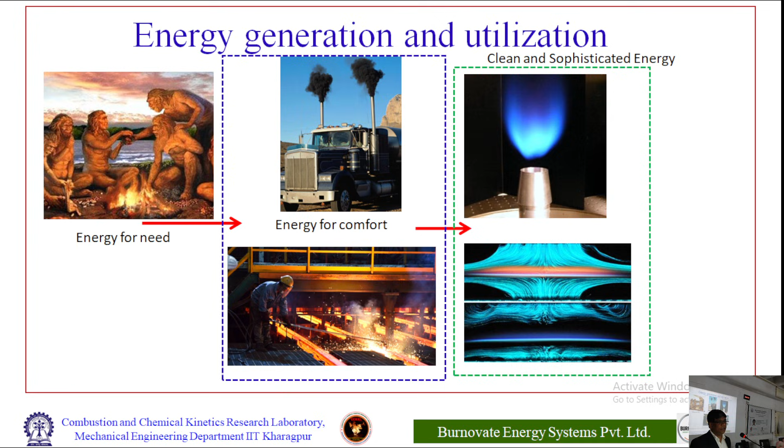Combustion is the first research of humankind. As you know, once flame or fire was identified, our civilization began. From that point to this point was a duration of thousands of years where we were not worrying much. Then after, energy efficiency needed to be increased and polluted emissions needed to be decreased - that was our primary goal. So finally we moved towards clean combustion, then towards sophisticated combustion technologies. But still, burning hydrocarbon fuel remains a problem.

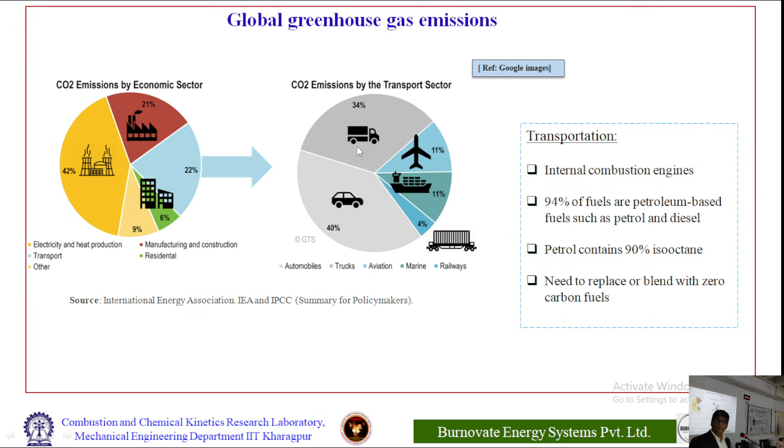So why do we need to focus on particular sectors like industries, automobiles, and transportation? This is the scenario - out of the total emissions, this is the sharing of these sectors. Now, to regulate these emissions, we formed certain emission indices. Earlier we used to follow the BS stage, meaning the Euro stage, now we have moved to the Bharat stage, our own standard. This is the difference between stage 4 and present stage 6, which is still not completely implemented across all combustion systems.

However, achieving the BS4 norms itself was very difficult. If you see over here, this is 0.63 grams per kilometer for the case of CO. In case of BS6, the same standard has been maintained - meaning even though the stage has changed, further reduction of CO is very challenging. However, NOx emissions have decreased. So between stage 4 and 6, these are the changes in NOx emissions.

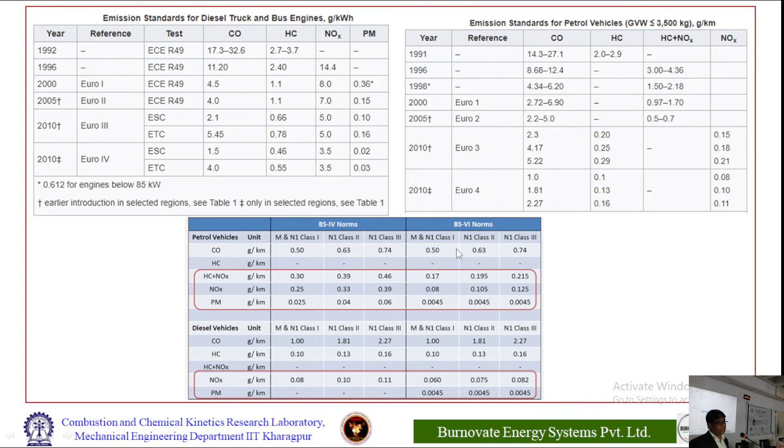Now what to do next? What is happening is the population is increasing, and even our comfort zone is increasing - meaning the number of AC applications, vehicles, and all other things are increasing continuously. However, even though we are in stage 6, our net emissions keep increasing because it is cumulative. So now what to do? We have to find out something like non-carbon phenomena.

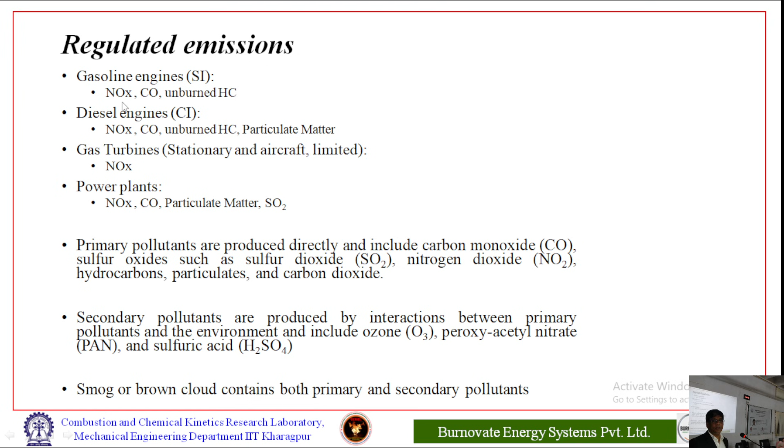Before going to that, let us see what the problems are with CO and NOx. Suppose this is CO exposure in hours - this much CO concentration and exposure time determines how much carboxyhemoglobin forms in our blood. If you see over here, for the case of 100 ppm, if we are exposed for around 2 to 3 hours, then we will start feeling headache.

This is a condition of what? So you are stuck in traffic and the traffic is very slowly moving, okay? So this is the condition, and you will be getting a headache, okay?

So if this is the situation, like you are working in the plant, all of a sudden certain combustion systems have gone off, okay? So now you will be fighting over there about what has happened, what is the situation over there. Meanwhile, even 1 hour of exposure is sufficient for a throbbing headache, right? And if it is around 600 ppm, this is a much more dangerous condition, even less than 1 hour, so this is like a coma, okay?

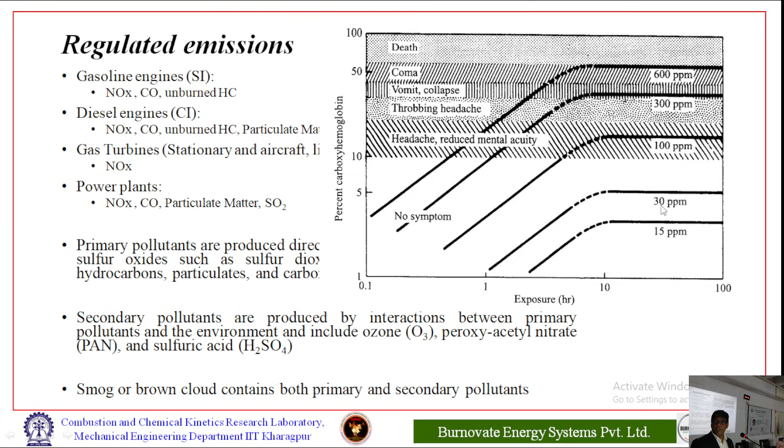So now, these are not the severe cases, they can even be identified, but the number of vehicles is increasing continuously, so the net amount is increasing in the atmosphere, right? So that is one. In case of NOx, what is happening? Even this NOx footprint is more dangerous than your CO footprint.

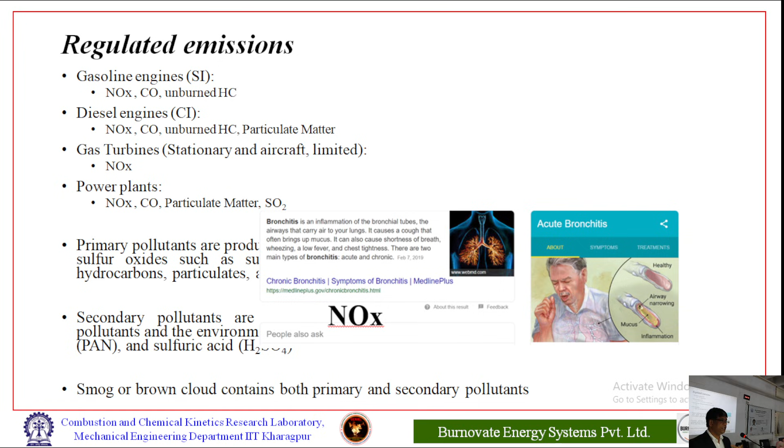Because of the NOx, your inhaling system, these particular tubes, get cladded with mucus. Then when you are inhaling and exhaling, you feel a certain situation like irritation, and that irritation gives you a cough. So this is one particular phenomena.

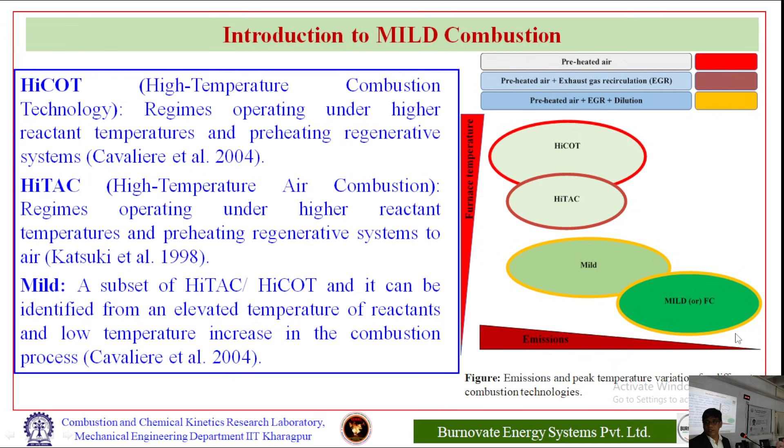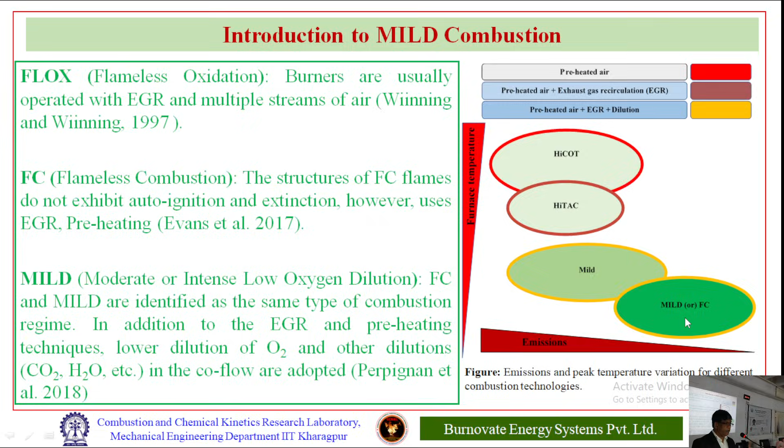So emissions are certainly high, and efficiency is increasing, but how to reach this particular balance? We are not much worried about that. The combustion should be stabilized very well, and the emissions should be low enough. So then how to achieve this? This is one novel technique for hydrocarbon fuels, called flameless or mild combustion or colorless distributed combustion. Different people call it by different names.

The name itself tells you thermal NOx, meaning this NOx is very well related with temperature. If temperature is increasing, the NOx concentration also keeps on increasing. Another one is fuel NOx, that is, if nitrogen is there in the fuel, when a cracking phenomenon happens inside, that forms NOx. The next one is prompt NOx. This is not very dangerous because it happens at the beginning of the reaction, and then it controls itself like other NOx.

Now this particular thermal NOx, what is happening here? Whenever temperature is above 1800 Kelvin, right, then your nitrogen, N2, splits into N and N, and oxygen splits into O and O. Then these kinds of reactions are severe over there, like N2 plus O forming NO, plus N plus O2 forming NO again. This particular NO is called NOx, as you know very well, right? This reaction can be called the Zeldovich mechanism, because the scientist identified it long back. If you want to suppress this thermal NOx, you have to maintain your temperature below 1800 Kelvin, right?

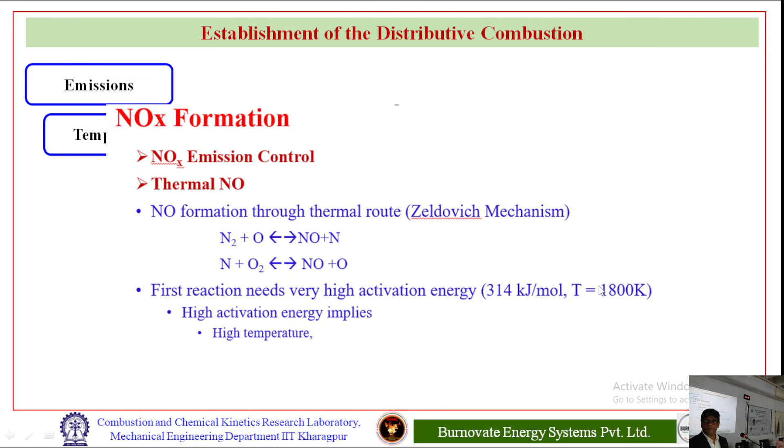So now, in case of our combustion system, when you are running combustion at low temperature, we can call it lean combustion, right? So obviously your NOx is very low because the furnace temperature is less, or the combustor temperature is less, that's what makes NOx emissions less. But what is happening? Unburned fuel, or unburned CO, is dominating over here, meaning CO, whatever is formed from the fuel, is not being consumed completely, right?

On the other side, if you go for a higher temperature, what happens is the CO is completely consumed, but still NOx emissions are high over here because NOx is directly related with temperature, right? Then what to do? Obviously there is a solution: if you run this combustion somewhere in between, then both your CO and your NOx emissions are low.

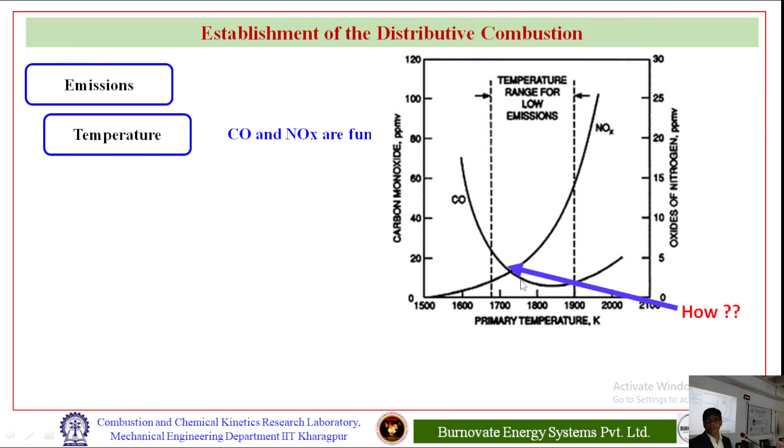So you can say this is lean combustion, and you can say this is around stoichiometric combustion, so in between may not be possible very well, meaning stabilizing the flame in conventional flame is difficult over there. So to attain combustion in this particular zone, the concept of flameless or mild combustion or colorless distributed combustion has been identified.

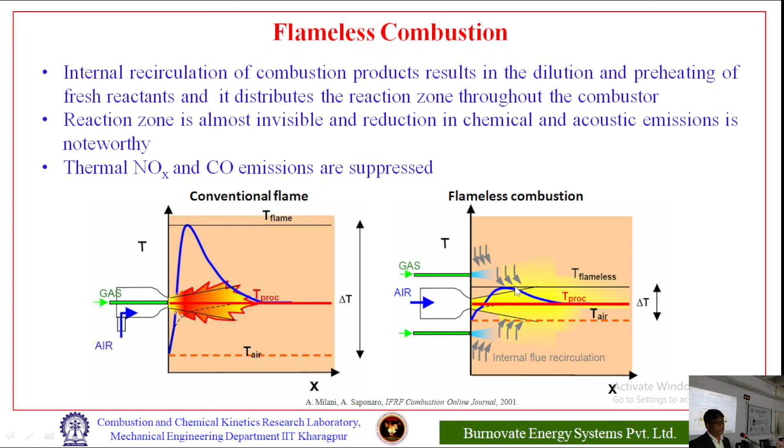Here, oxygen is not directly available; it gets distributed over here. That's why the peak temperature is reduced. So whatever so-called NOx formation occurs, that NOx formation is reduced here.

This particular phenomenon of flameless combustion was initially identified by Wunning et al. He was actually a scientist in a particular glass company. The glass company needed quality, complete combustion with reduced emissions, clean combustion as we can say. When they were experimenting, all of a sudden they identified this particular phenomenon.

Then they applied certain concepts and measured this particular phenomenon, how much amount of heat is to be recirculated, how much amount of exhaust gases are to be recirculated.

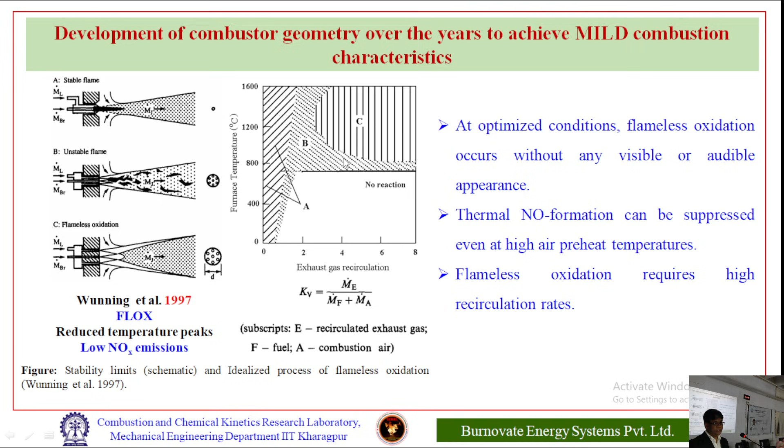Here, again the similar condition like no reaction, but temperature is increased, so this particular zone is called unstable flameless combustion, or conventional combustion in between. This zone is complete flameless combustion.

However, once this particular topic was identified by Wunning, some prominent researchers started working in this direction. What is the reason behind achieving flameless combustion? What are the conditions required to stabilize the flame?

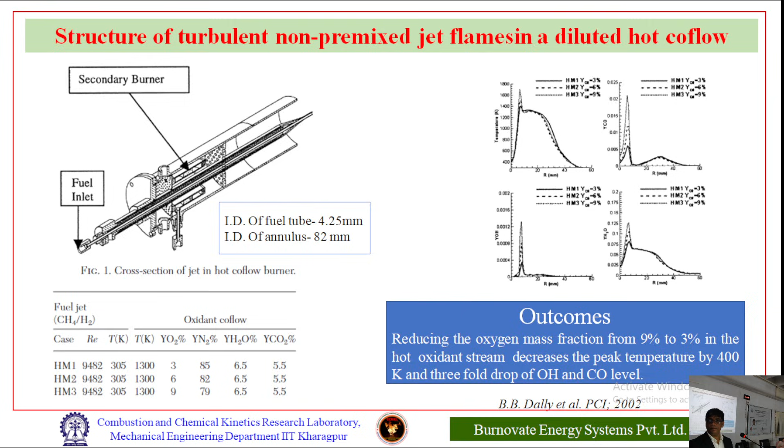Initially, three prominent people, like Professor Dally and Professor Sudarshan Kumar from IIT Bombay, and even Maria Giovanna from Italy, worked significantly on this particular concept. These are a few results of Professor Sudarshan Kumar from when he was doing his PhD at IISc Bangalore. This is my study when I was doing my PhD under the guidance of Professor Sudarshan Kumar again.

So far, whatever happened here was flameless combustion with gaseous fuels. In this particular case, achieving flameless combustion is difficult. However, compared to liquid fuel, it is easier, we can say.

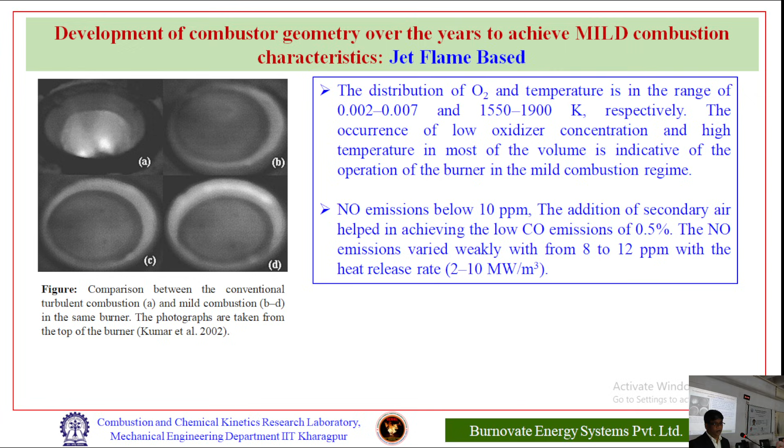In case of liquid fuel, what you need to do: initially the fuel needs to be injected as small droplets, each droplet needs to be evaporated, this evaporated species needs to be distributed inside the combustor. If the mixture is within the range of flammability, then only the flame stabilizes.

So in case of gaseous fuel, if the gaseous fuel and oxidizer mix very well, then combustion is stabilized. Here, before that reaction, many sequences of operations are there, and these need to be completed.

So until those conditions are satisfied, we have to recirculate the fuel and oxidizer very well inside the combustor. That means, compared to gaseous fuel recirculation-based flameless combustors, in this particular case a well-stirred reactor is required here.

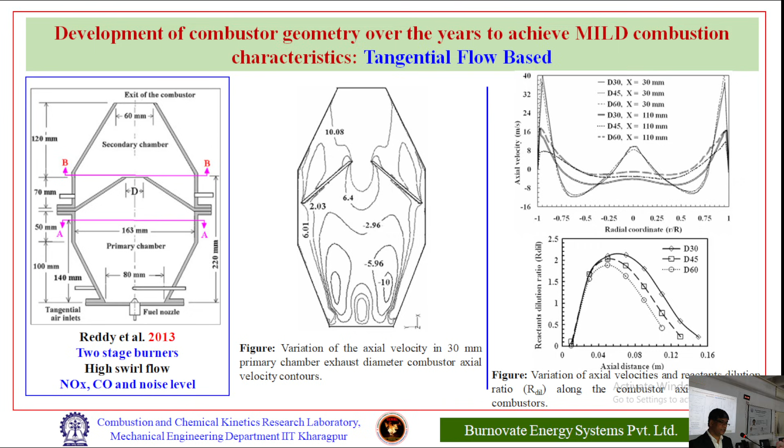So why are we explaining this particular flameless combustion concept called well-stirred reactor or perfectly stirred reactor? These particular concepts we are going to utilize in ammonia combustion as well as hydrogen combustion in further slides. So this is our flameless combustion with liquid fuel.

This is the conventional flame, as you can see here. This is the flameless combustion. As the name suggests, there is no flame here, meaning no visible flame. However, a very small flame is visible here.

Otherwise, it is like a transparent orange kind of environment. The flame was stabilizing. Even though this particular combustor was big enough, from the top of the combustor the entire combustor can be seen very well.

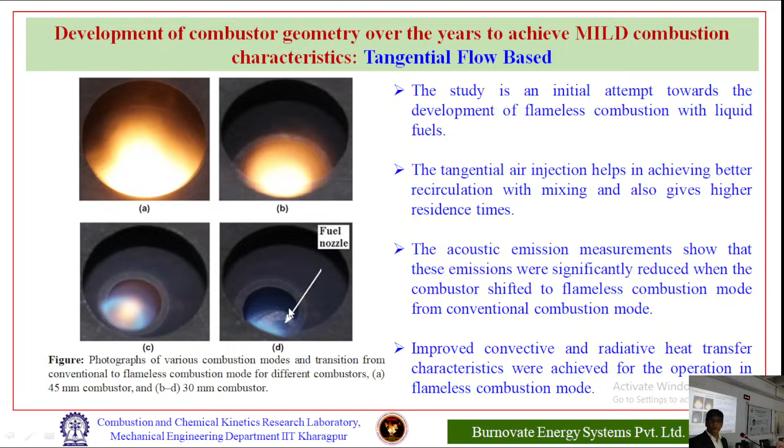So this is the recent technique of conventional fuels. Now the challenge is, if you are using conventional fuels by adopting this flameless combustion or mild combustion or colorless distributed combustion technique, still CO2 is coming out, right? When you are running carbon fuels, CO2 will be produced. However much you minimize CO and NOx, you cannot avoid this CO2, and that CO2 is causing global warming and certain other issues.

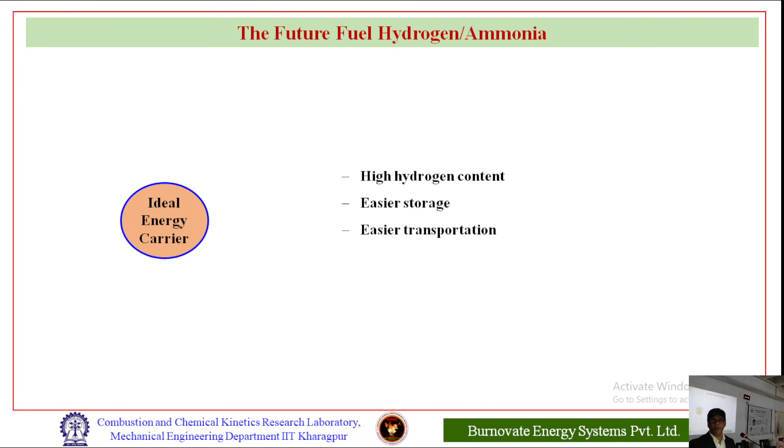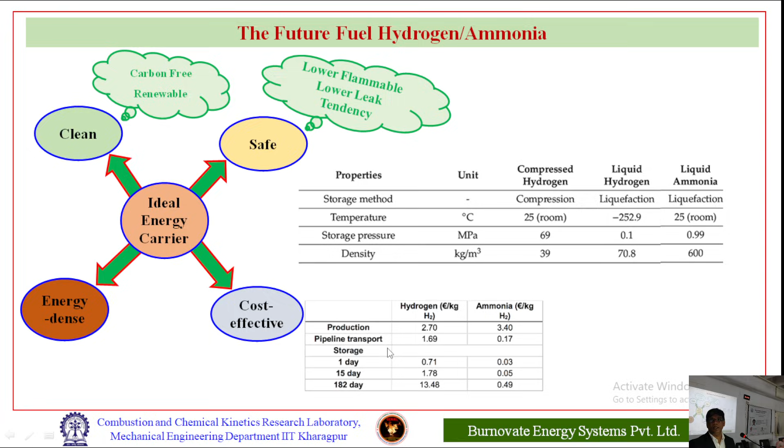Okay, now what to do? We have to go towards non-carbon fuel. Then what is the strong non-carbon fuel? Hydrogen, right? We have identified hydrogen as the potential fuel for that. Now let us discuss the challenges involved with hydrogen, then let us come back to ammonia. This is a very introductory talk, many students are involved here, so let us see step by step.

So what is called green hydrogen? Green hydrogen means, first, we do an electrolysis process. Water electrolysis process means we take one anode and one cathode, and water is continuously supplied. The water splits, and from that splitting or cracking of the water, hydrogen and oxygen are produced, and the rest of the water comes out again.

To complete this process, certain energy is required. Then how to take that energy, where to take it from? If we use energy from green resources, like photovoltaic cells, solar energy, wind energy, or hydro energy - non-carbon sources of energy - and do electrolysis through that, whatever hydrogen is produced can be called green hydrogen.

Next, pink hydrogen. Here we are not using renewable energy sources, we are using nuclear sources, meaning carbon content is zero again. This particular thing is called pink hydrogen.

The rest of things are actually carbon sources, if you see. We take natural gas and pass it to a reformer, which we can call a steam methane reformer. When we pass it through this, cracking occurs again and hydrogen comes out, which we store. Now the question is, the hydrogen we are storing, what to do about the CO2? Otherwise this is similar to just burning fuel normally. Then why should this big electrolysis process or reformer be required at all?

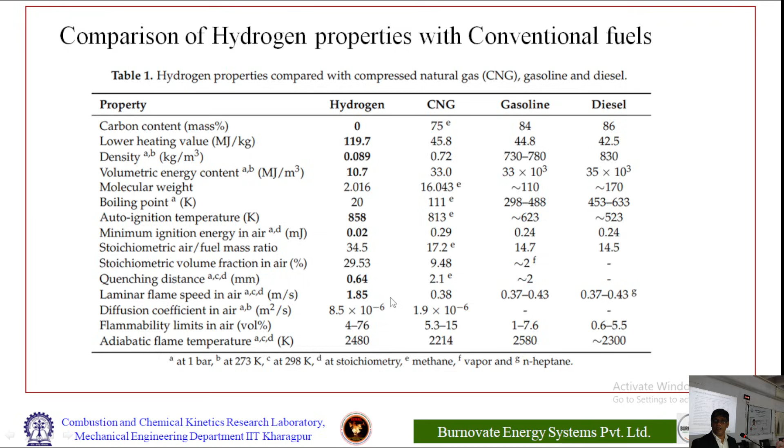One more thing is flammability. What does flammability mean? You vary the fuel and oxidizer - when fuel is higher, when oxidizer is higher, what do you call that? Equivalence ratio. Stoichiometry means, to burn a certain amount of fuel, how much oxidizer is exactly required so that in the exhaust gases the fuel should not be there - it should be completely consumed with only the minimum amount of CO allowed by combustion norms. That amount of oxidizer is called stoichiometric. Whenever you increase the oxidizer, that is called lean; whenever you decrease the oxidizer content, that is called rich. Two limits are there: lean limit and rich limit. For conventional fuels, the lean limit is about 0.5 and the rich limit is 1.4. But for hydrogen, the lean limit is 0.2 and the rich limit is 6.2.

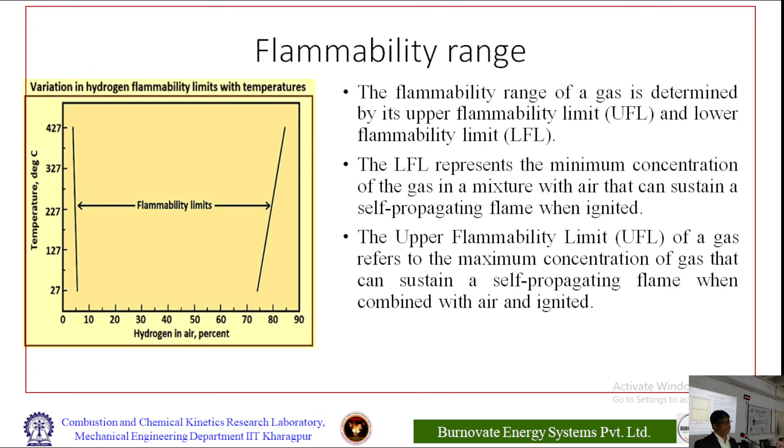So what is the problem with that? In case of domestic needs, if you have a cylinder with a minor leakage, even if you smell it, you won't worry much - today or tomorrow you'll call the mechanic, and meanwhile you'll proceed with cooking, because that small a quantity won't damage anything. But in case of hydrogen, even a very small quantity, if an ignition source is there, will catch fire, because it can ignite even at 0.2 equivalence ratio. This is the flammability range, and we've also just discussed auto ignition temperature.

Then what is the problem with auto ignition temperature? We are talking here about internal combustion engines as well as gas turbine engines. Let us take the example of internal combustion engines. In a diesel engine, what is happening? You are compressing the air, then injecting the fuel - you don't have any spark plug there. So how is it burning? When you compress the air, the temperature reached is more than the auto ignition temperature of diesel fuel. Similarly, for hydrogen, if you want to bring about that situation - diesel's auto ignition temperature is around 280 centigrade, but here it is 500. To reach that, whereas in diesel we already go to 20 bar pressure, now you have to go to 40 bar pressure. So what is the problem in that? Then your system becomes bulky. These are different challenges that are there.

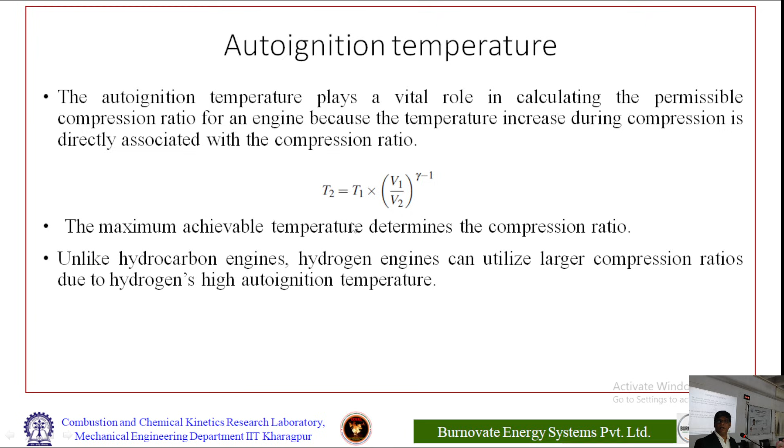And minimum ignition energy - what is the minimum ignition energy? So now my question is, how are you igniting your gas stove? You have a spark, right? So would the same lighter, if installed on your car, work?

No, why is it not working? Obviously the spark may not be sufficient, right? Or otherwise it may be too much, based upon the condition. So based upon this particular condition, a particular amount of ignition source is required.

Similarly, in case of hydrogen, a very small ignition source is enough. Suppose in domestic needs, when a small amount of LPG is leaking and somebody hasn't realized that, then after some time someone turns on a switch, the spark it generates creates the problem, and fire accidents have taken place in many cases. In case of hydrogen, the problems are even fourfold.

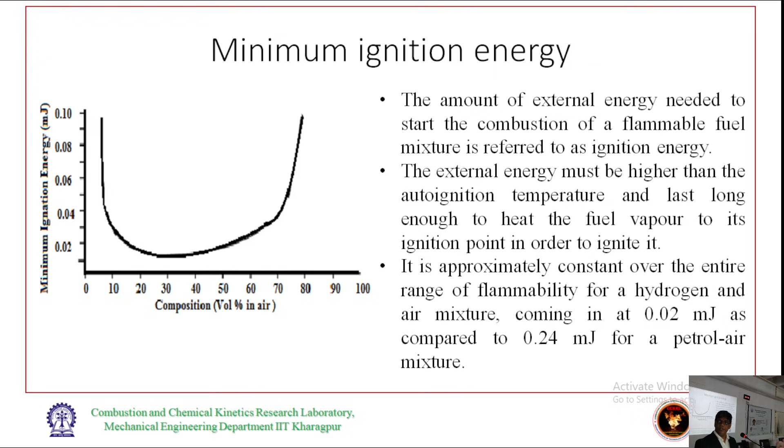Why? Even a small quantity is sufficient to stabilize the flame, meaning the lean equivalence ratio is very low, 0.2 for example. In conventional fuels, the ignition energy is around 0.24, but in hydrogen it's 10 times less than that. A very small source is enough. That means if hydrogen is leaking, even at a mixture of 0.2, a very small ignition source available there will start burning it.

Another thing is quenching distance. What is the quenching distance? It's like in your stove, you might have observed the holes. If the hole size is bigger, what will happen? Obviously the flame will go inside, right? The holes have been designed based upon the quenching diameter, or quenching distance, as we call it.

So what does quenching distance mean? If your mixture is pre-mixed — the name itself tells you, you don't need to worry much — the fuel and oxidizer are both mixed very well before the reaction. That is pre-mixed combustion. In case of your gas stove also, that is partially pre-mixed.

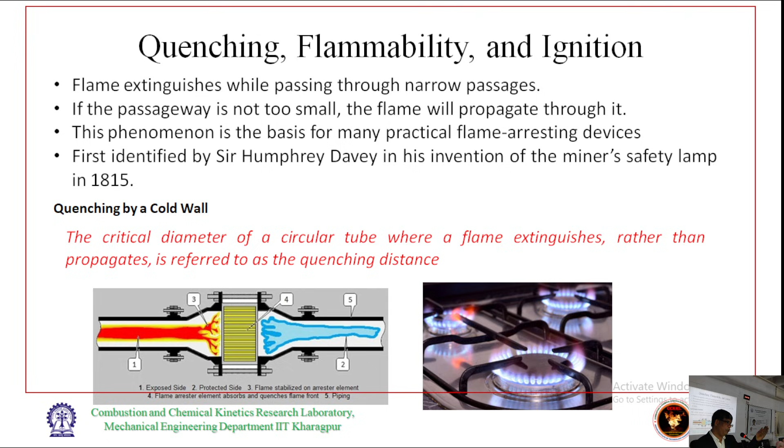When that charge is coming through the holes, the flame is not going inside; the flame stabilizes above the holes only. It's designed such a way. So what does quenching diameter mean?

By mistake, if the flame goes inside — if this is the flame volume, your channel can be cylindrical or rectangular, no problem — this is the flame front or reaction zone. In this reaction zone, whatever amount of energy is releasing, if that energy is completely absorbed by the surrounding material, then the flame will be quenched down, meaning the flame cannot be sustained, since whatever energy it released has been absorbed, so the flame will not stabilize.

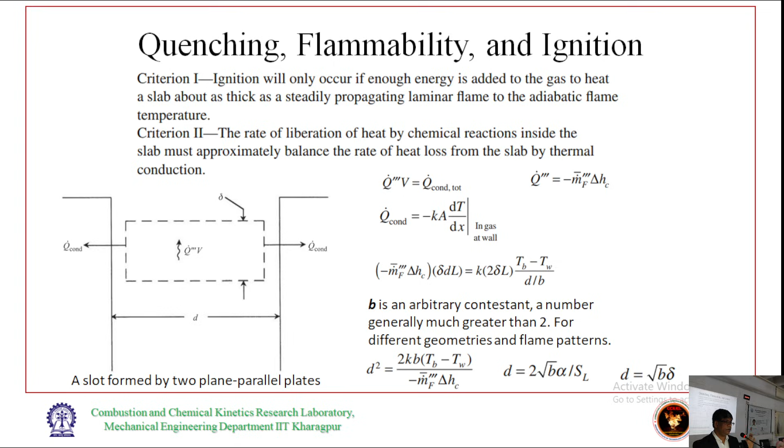Otherwise, if the energy is more than the losses there, then the flame will happily stabilize. It has strength, it can stabilize here and further move inside. Till where will it move? Wherever we have a fuel source, it will move till there, and all of a sudden an accident will take place. So for every device operating based on pre-mixed nature, you have to find out what is the quenching diameter for that particular mixture.

Now let us see this quenching diameter scenario. For case of methane, at equivalence ratio of 1, meaning stoichiometry, the quenching distance is 1.75 millimeters. If it is propane, C3H8, this is around 2 millimeters. Your LPG stove's composition is a mixture of propane and butane, so for that the quenching diameter is around 1.75 to 2 millimeters.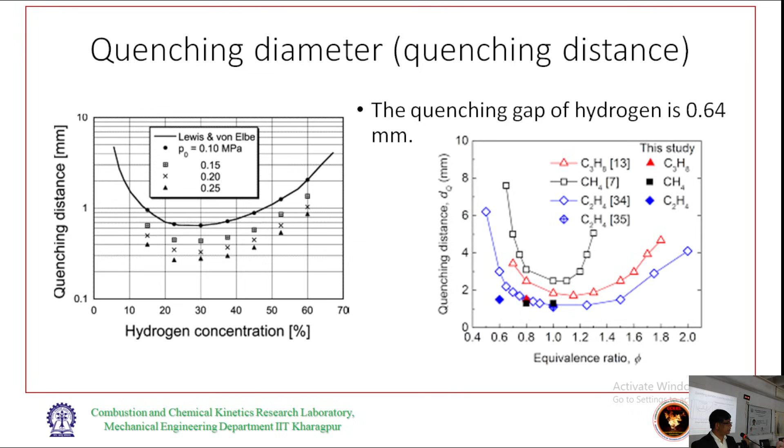So this is another challenge, even laminar burning velocity. What does laminar burning velocity mean?

If you have a tube, let's assume this is a 4 meter tube, and initially you fill this tube with certain fuel and air. You fill it and close both sides. Now you start ignition over here by sparking or something. Now the flame will be moving towards here, right? At what velocity the flame is moving, that is the flame velocity, laminar burning velocity.

Now whatever fuels we are using, starting from methane to any other carbon fuels up to C12H26, all fuels' laminar burning velocity ranges from 30 to 50 centimeters per second. This is the range whatever combustors you are using. Now unfortunately hydrogen is 200 centimeters per second, meaning 4 or 5 times faster.

Now you have habituated to running with a certain speed. All of a sudden you need to run 5 times that. Would you be able to run? Not possible. Here, if the laminar burning velocity is higher, that means the fuel is reacting faster. So hydrogen is a faster reactor.

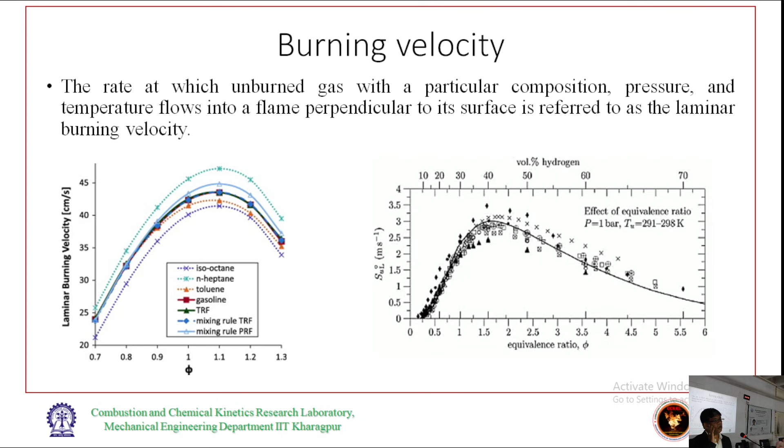Then you can ask, what if it is reacting faster? That means if hydrogen is entering inside the combustor, immediately it is burning. Then your flame zone is very small. When flame zone is very small, remember our slides on conventional and flameless combustion. When flame zone is very small with high energy, the flame temperature is higher. When flame temperature is higher, NOx formation is also higher. So in case of hydrogen, there is no carbon, but the problem is NOx formation, which is very high. So that is the burning velocity.

Whenever it is hydrogen, very low energy content, that's what we expect. So this problem also we need to solve further. So now what have we got? This is the thing we have discussed. Now, storage research is going on for how to develop high pressure cylinders.

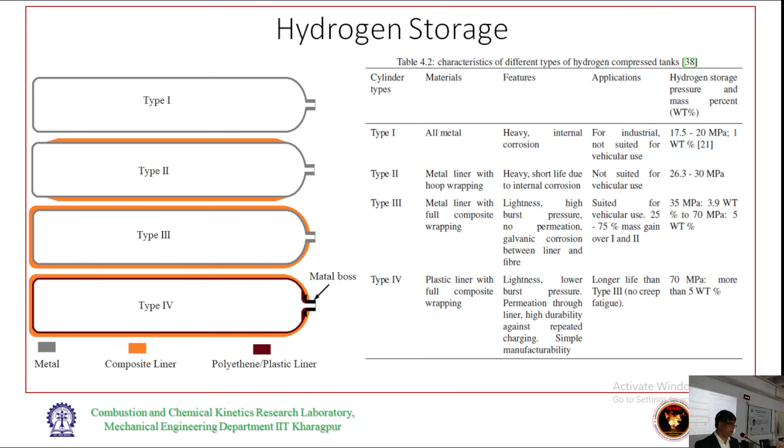This is type 1, type 2, type 3, type 4. In case of type 4, you can store the gas up to 700 bar. So that means whatever example we have taken, instead of 800 grams, we can store over here 2 kg or 3 kg. But still the solution is not as soluble as reaching the case of gasoline storage or even methane storage.

Now that is the reason why instead of using hydrogen, we can use ammonia as the fuel. What is ammonia? You take hydrogen and nitrogen, do a chemical hydrolysis process, and produce ammonia. Then you will be using this ammonia. Why should we use ammonia?

See over here, whenever ammonia is at 10 bar pressure and ambient temperature, that is in the liquid state, just like your gas cylinder storage. Your cylinder is there, did you ever shake it? When you shake it, it is liquid, smashing inside. Now my question is, when it is liquid, how are you getting the gas to your stove? So what is happening over there? That LPG, the boiling temperature is the ambient temperature when it is at 4 bar. So the cylinder is 4 bar. The cylinder surface is all the time exposed to the environment, it is evaporating continuously, and that evaporating gas is passing over here to the stove.

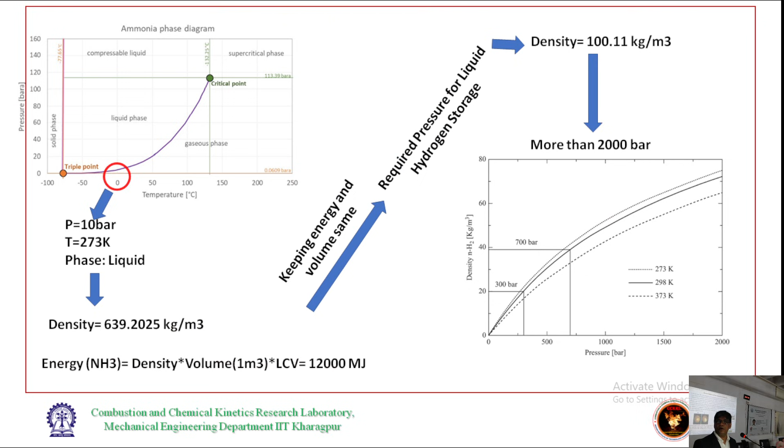The similar phenomena here, the LPG is storing over here, that ammonia is storing over here at 10 bar and ambient temperature. That is continuously evaporating and supplying to your needs. And here the advantage is ammonia is non-flammable at environmental conditions, it won't burn even if it is leaking. Only thing is health hazards are there. So luckily you can detect ammonia leakage very well because it gives a noxious smell, and immediately you can close it. It is safe and you can transport it. And this ammonia at 10 bar and atmospheric condition has a density of 639 kg per cubic meter, just like your gasoline. So now let's go back over here because we missed it.

Okay, this particular thing. Storage-wise, the problem is solved. The hydrogen storage and ammonia storage, the solution came over here.

Now what is the problem with ammonia? The ammonia problem is like our conventional fuels' laminar burning velocity, as we mentioned, 30 to 50 centimeters per second. Hydrogen is 200 centimeters per second, which is very fast moving. Contrary to this, ammonia is 6 to 7.

You can call this particular one as a snail, this one as your motorbike, and hydrogen you can call it as a bullet train. You are habituated to run with the motorbike at least. Now you need to walk with the snail. How long can you walk? For a few minutes you can walk, then you will be frustrated.

The similar phenomena happens in case of reaction also. Since laminar burning velocity is very low, that means reaction is also low - it is not reacting much, right? So this is the fear. Need to do something, right? And another problem is over here.

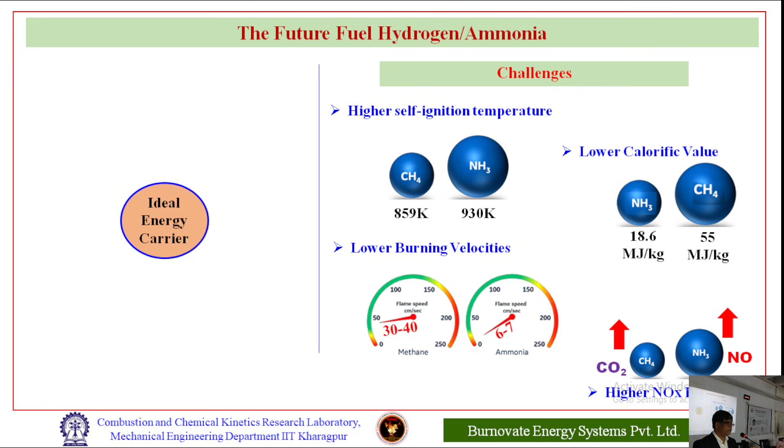NO formation - that is the fuel-based NO, meaning fuel NOx. The fuel NOx is dominating over here. That we are going to see now.

So initially, who has identified this ammonia as a fuel - this is not new. During World War II, when diesel scarcity was there, ammonia has been used. But the problem is because of incomplete combustion, the ammonia emissions were coming, creating huge discomfort. Then meanwhile, the diesel issues might have been solved, so they stopped using this ammonia direct injection in the internal combustion engine. That means they had identified it as a fuel.

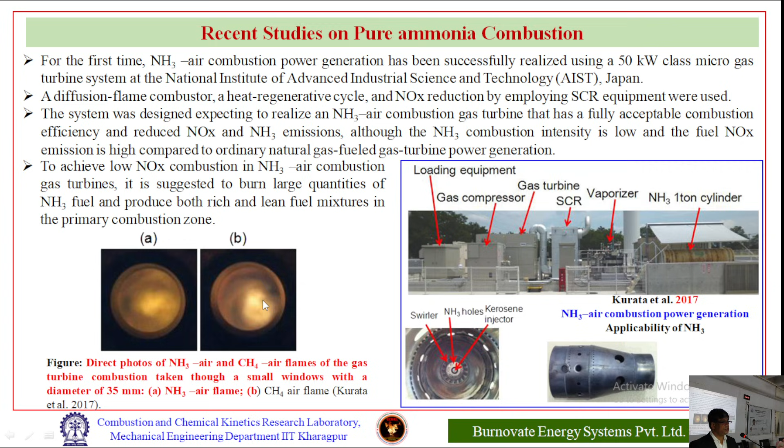Now recently in Japan, ammonia has been used as a fuel. Reaction was taking place very well, but these are the issues: when heating the combustion, temperature is around 500 to 600 degrees Celsius, complete combustion was happening over here, meaning ammonia leak was not there. When the preheating is reduced, like 450 Celsius, then ammonia was leaking to the environment. So this is one problem.

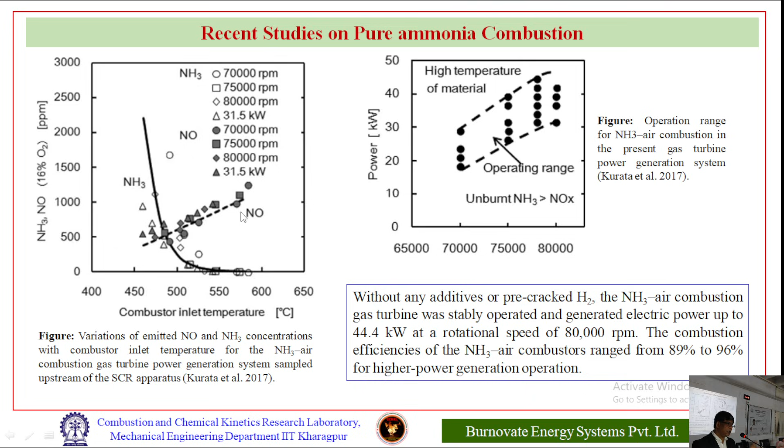When complete combustion was happening, the NOx formation was a lot over here - NOx is like 1000 ppm. Even in case of conventional fuels, we were worrying about 20 ppm, 30 ppm. Now, ammonia is being used as the fuel very well, but a huge amount of NOx is producing. Combustion research upon this ammonia has been started from that point.

Now, certain research has been taken place by Mahendra Reddy et al. When burning pure ammonia, around 600 to 700 ppm of NOx was observed. When it is simply pure methane, this is just 20 ppm.

So now, as you know, ammonia is a slow fuel or lazy fuel, you can call it, because its burning velocity is just 6 to 7. Certain things need to be added. You cannot walk with the snail, but you love the snail, so what you are doing is taking the snail on your vehicle and going.

Similarly here, you are adding a certain amount of hydrocarbon fuels over here. When you are adding certain amount of hydrocarbon fuels, what is happening? We usually expect the NOx emissions to behave like interpolation or something similar, but when you are adding a certain amount of hydrocarbon fuel, NOx is increasing over here - that is at the time of mixing ammonia and adding certain hydrocarbon fuels.

At the same time, we also experimented. This is the combustor we have developed in our laboratory. This is like a recuperative combustor.

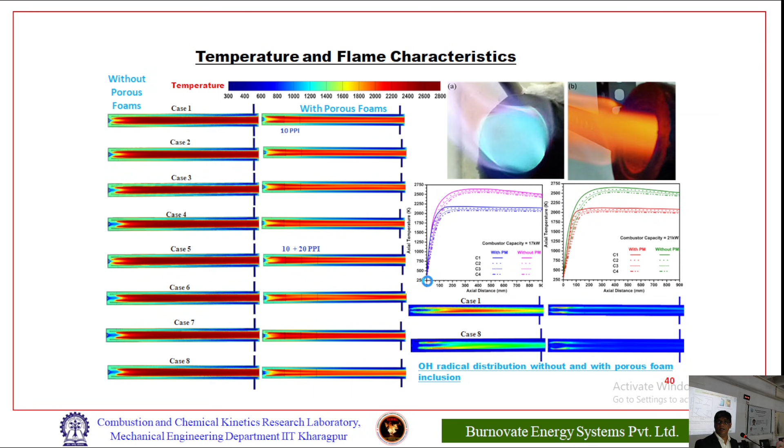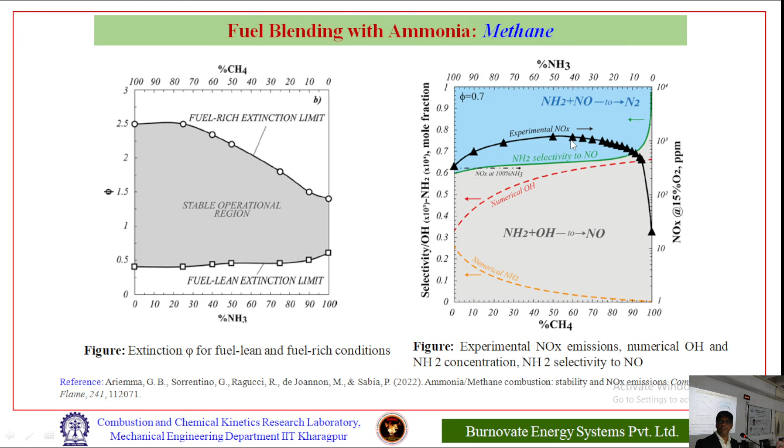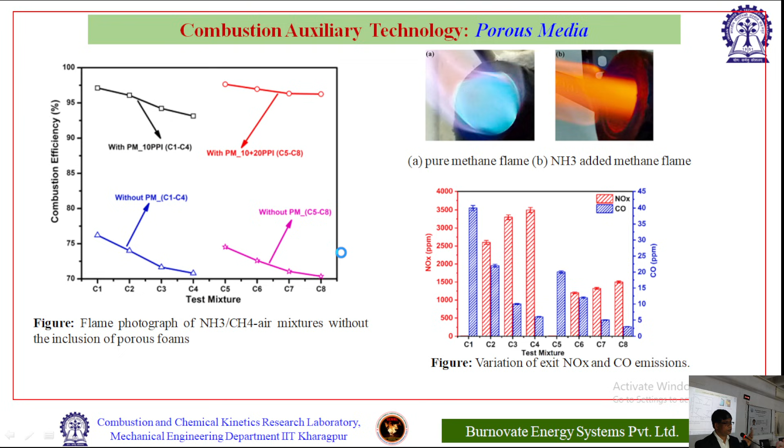So then, to stabilize the flame over here, since the flame was stabilizing outside the reactor, we have inserted a porous body inside, right? So then the flame is stabilizing completely inside the combustor. It even became possible for us to go to even higher thermal input, like this. Okay, this is the porous body over there. The flame got stabilized inside very well, right?

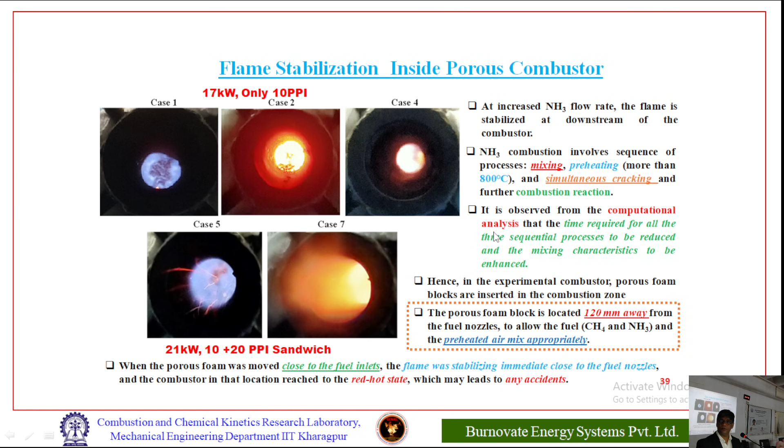Okay, but however, we are able to burn the fuel successfully, but NOx emissions are predominant. Then how to reduce the NOx emissions? So meanwhile, in the next generation of research, within this one decade, whatever we are talking about, this one decade, and then...

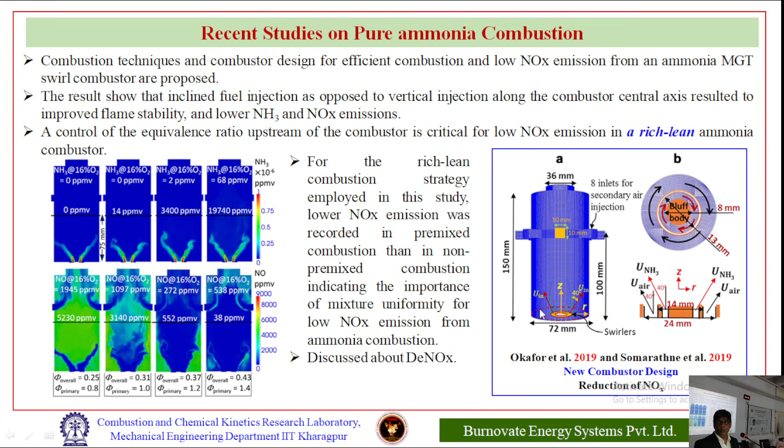Rich lean technique. What is the rich lean technique? At the bottom of the combustor, we are burning the rich ammonia, and then at a certain location in the downstream of the combustor, we are injecting certain oxidizer over here. Whatever NOx is formed over here, that NOx is reburning over here, right? So let us see over here.

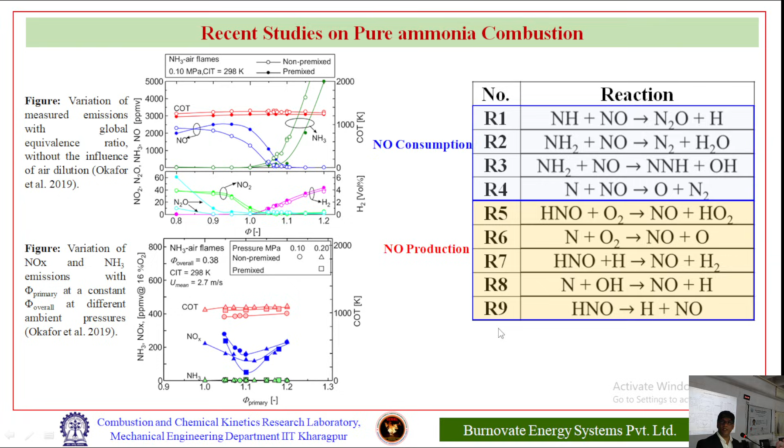This is the NOx production in the rich area. This is completely the NOx production in every reaction. These are the major reactions over there, right? This is the NOx production. Whatever NOx is so produced, in the excess air that we are giving in the lean area, okay, so that NOx is burning again and forming nitrogen over here. That's what we call the rich lean technique of NOx reburning, right?

So based upon that, with experience of our tubular combustor and rich lean technique, we have developed this particular combustor. This is there in our laboratory. Next slide, I am going to show you the setup. So what is that? This is 4 well-stirred reactors in series. This is the combustor line, 4 well-stirred reactors in series. So whatever this tangential air injection scheme is there, that is producing swirl inside.

That is the vortex formation happening. That's what recirculation is happening inside the combustor. The flame is stabilizing very well, right? That means the flameless combustion concept we have studied. Well-stirred reactor nature we need. So this is producing a well-stirred reactor. Okay, here we have taken 4 well-stirred reactors in series.

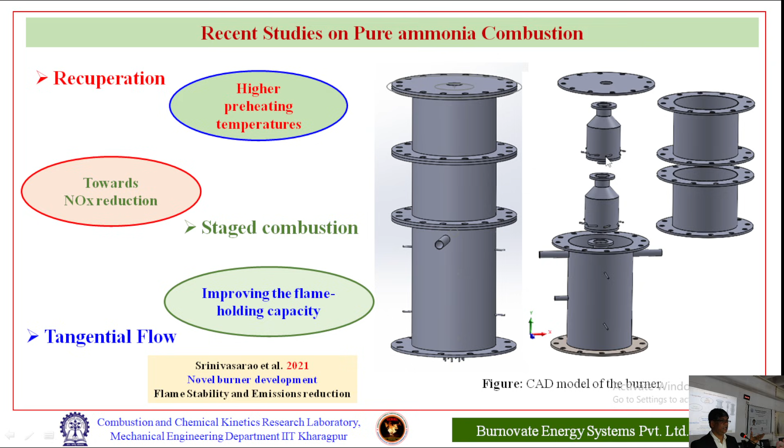And what more do we need to apply? Rich lean technique. So that's what, the total fuel we are giving over here. In the first one reactor or two reactors, it's rich condition. In the second, this 3rd reactor and 4th reactor, pure oxidizer is entering, that is the lean. So rich lean technique is also adapted over here.

So this is our combustor, what we have fabricated. This is the burner setup, like this is 4 feet height, which is 1.2 meters, and even diameter of 40 centimeters. 40 centimeters diameter, 120 centimeters height. So here we have given provision that if you want to run 2 stages also you can run, 3 stages also you can run, 4 stages also you can run. But it is not possible for single stage actually, right?

That way we have developed this combustor. The inside chamber, we have 4 of these chambers inside. So initially we have stabilized the flame with LPG. At the bottom if you see, this is this particular - okay, this is the pilot flame, pilot burner. Everything is our lab-made only, no commercially purchased. So we have stabilized the flame inside for certain time until all walls are getting heated.

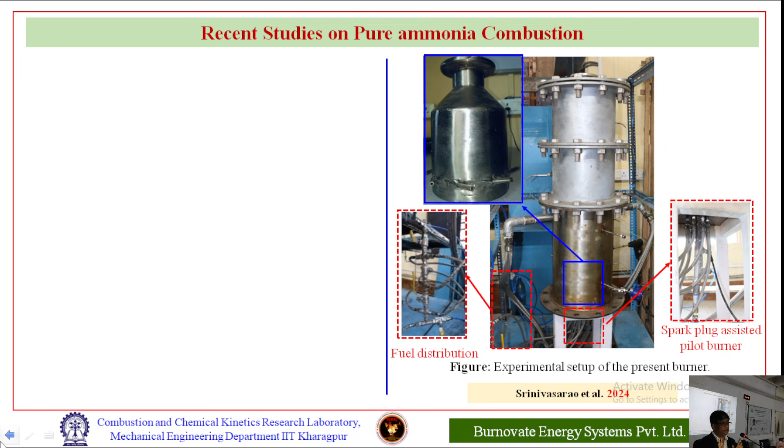Then after, ammonia is started injecting, then simultaneously LPG is reduced. At one point, the combustor was completely running with ammonia. Okay, so this is the experimental setup, and it is showing you what all equipments we have used, what all instruments we have used in our laboratory.

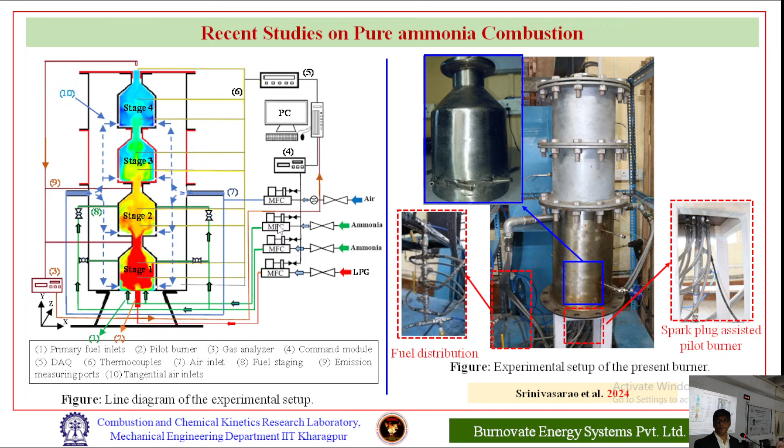So the combustion is happening inside, you can very clearly see, and these are the flames inside. This is for the case of 4-stage combustion.

So why has this particular phenomena happened? When you have 4 stages, when you are running the combustor at 10 kilowatt, suppose if you take equivalence ratio here - in this case X quantity of oxidizer you are giving, in this case almost 3X quantity of oxidizer you are giving.

But this X quantity of oxidizer has to be passed into all 4 combustors. So whatever air is entering each combustor, that inlet velocity is reduced for these 2 cases. When inlet velocity is reduced, the proper stirredness has not been achieved - meaning well-stirred reactor nature, whatever we are looking for, has not stabilized. So that is the reason a conventional wick-kind of flame has been stabilized here. That's why the emissions are very high here.

For the case of 30 and 40, the flame was stabilized very well here. With this understanding, for lower thermal inputs, a 2-stage design may be suitable. That study we have also done, but we are not showing it here, it will be lengthy.

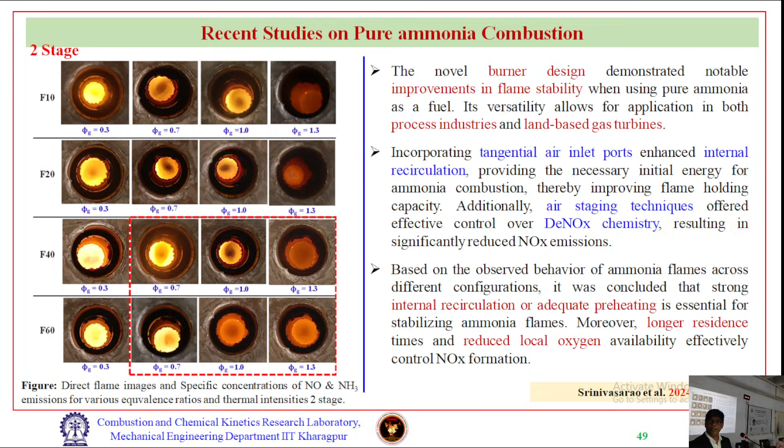So in case of ammonia, you have seen 2 cases. The first case with ammonia and hydrocarbon fuel mixing, the second case with pure ammonia mixing. In both cases, the first case obviously showed 1500, 1600 ppm of NOx. In the second case, your NOx ppms were even certain high enough here.

This is not NOx overall, this is NOx per kilowatt here. So still a certain amount is there - then what to do for that? And also here the combustor is very big, big enough, right? So then what to do?

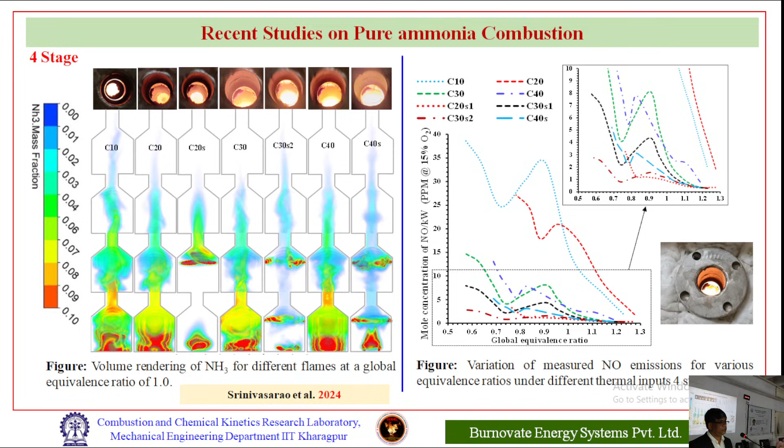This is applicable for land-based applications, like land-based gas turbines or industrial furnaces. But in case of gas turbine engines, the combustor should be compact enough. So then we used this particular technique, again using the mild combustion phenomena.

This is a certain burner, a pre-mixed burner. Upon this pre-mixed burner, initially we are passing LPG. This LPG is burning in this particular area. Pre-mixed means fuel plus oxidizer both are fed to this, and that is burning here.

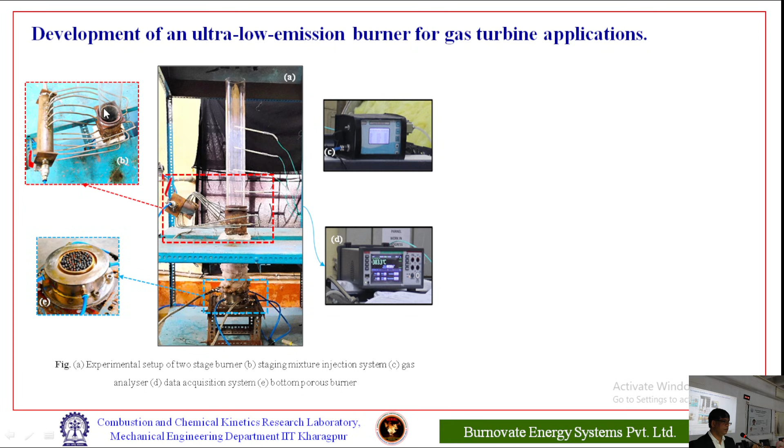After that, we are injecting ammonia radially. This is the ammonia supply, and it is distributed radially here. So this ammonia we are injecting into hot gases - what gases are those? Those are simply high temperature inert gases, because combustion has already taken place here. So these hot gases are steam and CO2 probably.

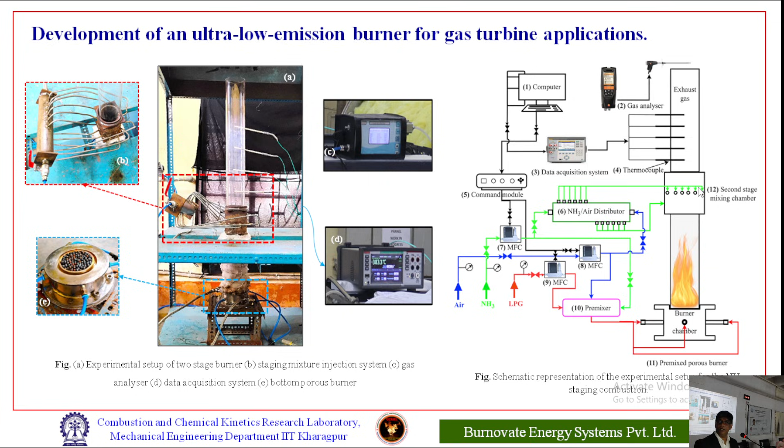So this is our experimental setup and the instruments we have used here. You can understand the phenomena very well here. This is your bottom burner and the flame has been stabilized here. Upon this, we have injected ammonia radially.

We have conducted this for every case. In case of combustion, instead of running the combustor in the laboratory for many cases, which is expensive - meaning you have to run the fuel, run the compressor, and every time measure - to avoid all that, you have to run CFD simulations.

As you know, combustion simulations are more complicated than other simulations because the reaction mechanisms also have to be calculated. For other cases, usually only fluid dynamics and heat transfer phenomena are involved. Here, along with fluid dynamics and heat transfer phenomena, the chemistry also has to be calculated. The chemistry is not simply 2-step or 3-step reactions - the species are like 50 species, 60 species, this many species we have to calculate.

So that's why initially we do simulations. Based upon the simulations, we design the combustor. Based upon that, we fabricate and test it. Then whatever the testing results are, those are close to the simulation almost. So these are our simulations here. And in this particular experiment, we observed one tremendous phenomena - we could not even believe it ourselves.

What happened when we were measuring the NOx emissions? The instrument was showing 2 ppm. We got doubt upon ourselves, or otherwise the equipment, the measuring instrument. So we moved to other cases and tested our equipment there. For those cases, whatever 200 ppm, 300 ppm it's supposed to show, it was showing. And again we came back to this particular case and tested it, again it was showing 2 ppm.

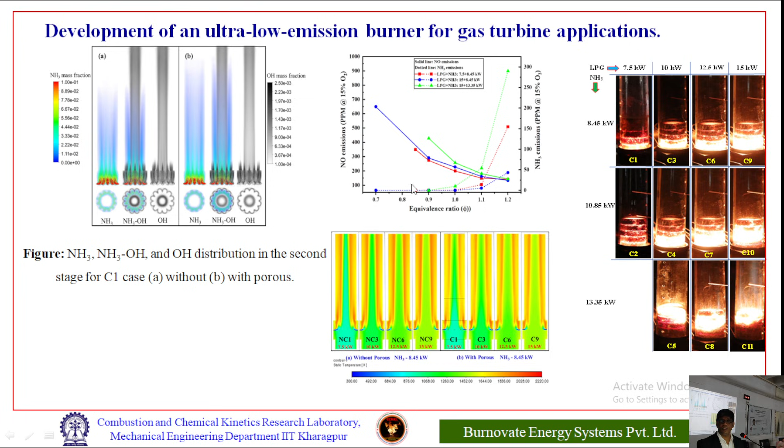Even earlier research of Srinivasarao has been published in many top journals, as well as this particular work has also been published in many top journals. And we have applied so far 5 patents upon these 2 works. The patents are in process now. So this is the answer.

So what we have seen in previous combustors, certain significant research needs to be conducted. Then you have to design the combustor, then test it, and then certify it, like a patent kind of thing. Only then can the product be delivered to the end users. So instead of that, the immediate solution is to mix a certain amount of hydrogen along with the conventional fuels.

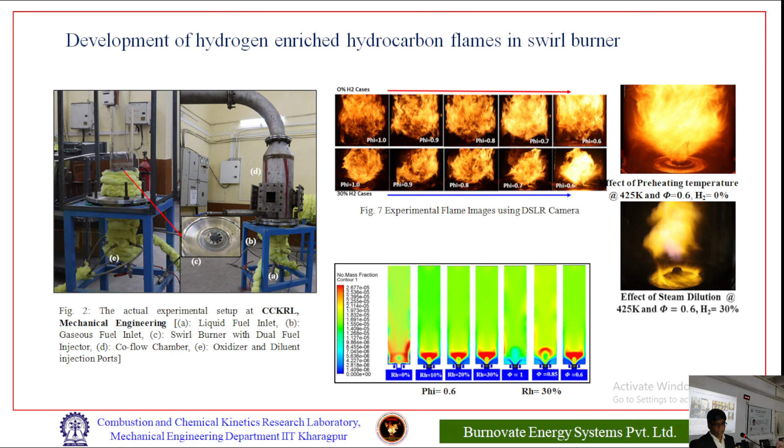So that's what another group of people has simultaneously been working upon - hydrogen combustion also. In the same direction, we also moved over here. This is pure hydrogen combustion.

Anyhow, to achieve low NOx, the only technique is a well-stirred reactor, nothing more. We have to make it a well-stirred reactor so the local reaction becomes a distributed reaction. Because of that, the temperature is reduced. This is very well suited in case of hydrogen combustion, because hydrogen is highly reactive - in a small zone, hydrogen burns and gives a lot of temperature, and because of that, NOx forms a lot. Even in case of pure hydrogen and air at stoichiometry, the NOx emissions are again in the thousands.

Then how to solve that also? In that case, the only solution is distributing the flame very well and even going towards the lean side, whatever is possible. When you go to the lean side, what is the advantage? A lot of air is being put in. Obviously, heat energy release equals mCp delta T - when your mass is increasing, the temperature should be reduced, and then NOx will be reduced.

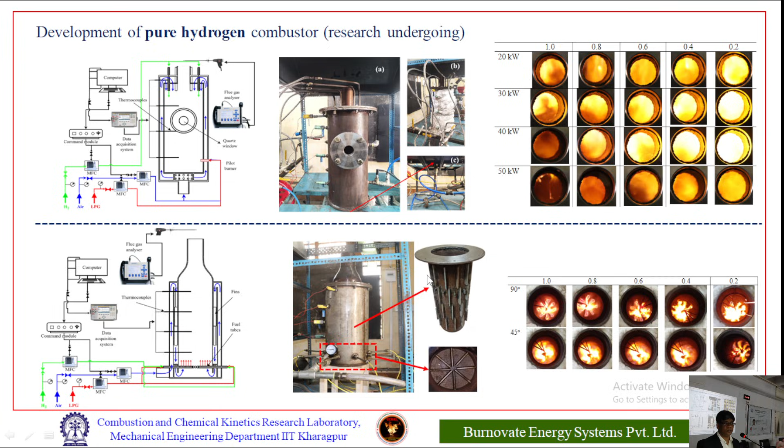So please let me conclude now. In this present session, we have started about what is the problem with pollutant emissions to human beings, as well as in case of conventional combustion, how to suppress them. Many techniques, like starting with FLOX combustion and reached towards flameless combustion. The emissions have been suppressed very well, but still the CO2 cannot be suppressed. So that has to come out.

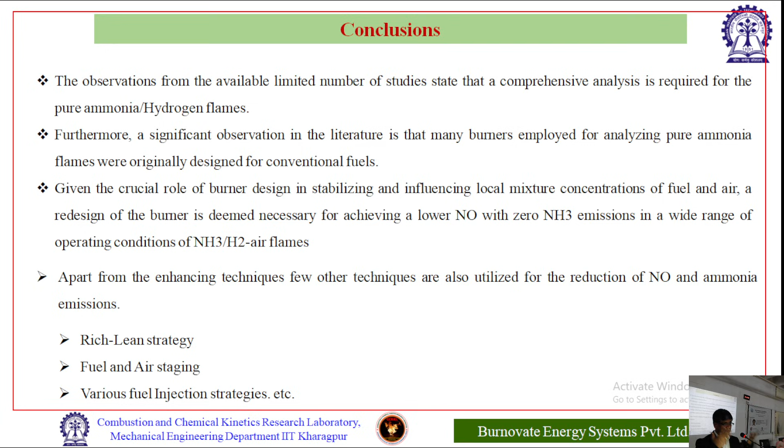But if you want to suppress the CO2, then you have to change it to a non-carbon fuel, that is like hydrogen. Hydrogen again, many challenges are there. Then converted into ammonia. In the two streams of ammonia combustion as well as hydrogen combustion, the total combustion community is projecting in the two directions. So in our laboratory also we are projecting in the same.

That means when you pass the ammonia in high temperature tubes, that is like thermal cracking we can call it. That ammonia will be splitting back again to hydrogen and nitrogen - thermal cracking we can call it simply. If the tubes are coated with certain materials like nickel, or platinum and ruthenium, then the temperature of preheating will be reducing. In case of pure thermal cracking, you need to take it to 1500 Kelvin.

In case of nickel, at 800 to 900 Kelvin in between, the cracking will be initiated. When you use ruthenium, it will be reducing again. When you use platinum coating, it will reduce further. That is the cracking phenomena. In this particular direction, Gangadhar is working. Unfortunately we don't have the equipment for that, so that is the reason we are working numerically.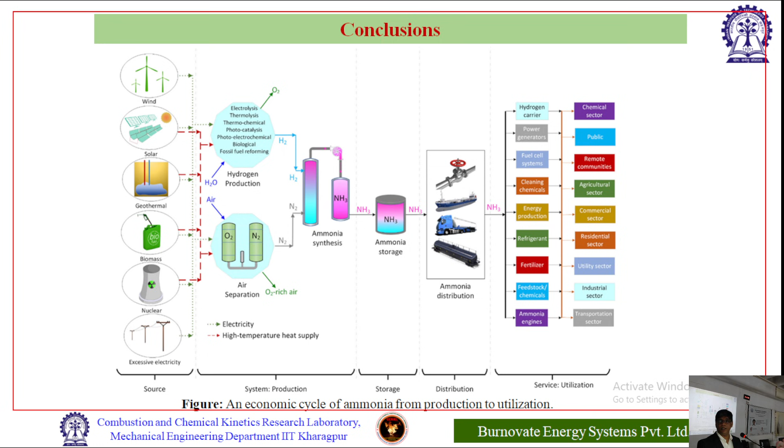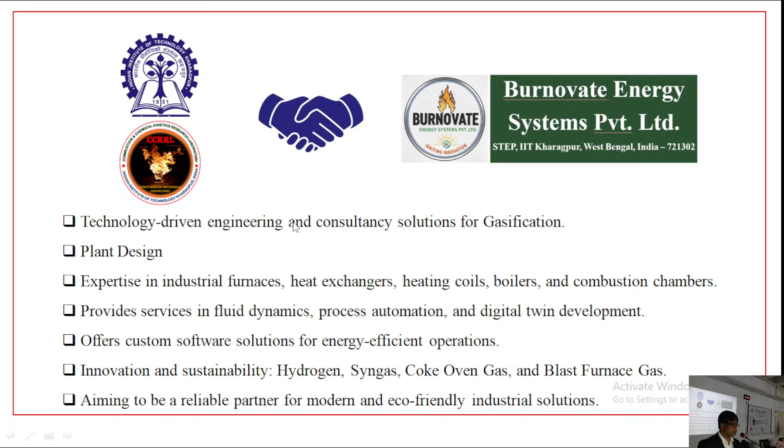This is related with combustion equipment as well as gasification - one more sub area - and also some CFD solutions, as well as combustion. Whatever combustion we have produced, we are ready to sell to anyone because we have published as well as got a few patents also. So that is the phenomenon. Thanks a lot. Thank you.